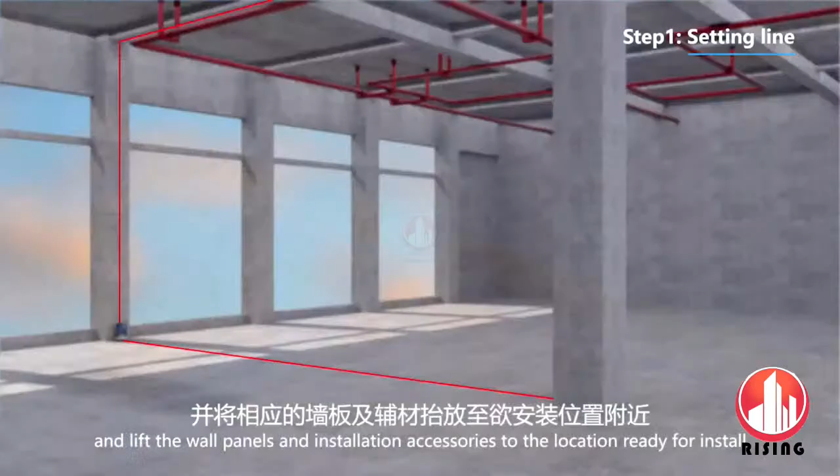Hammer, trowel, electric circular saw, electric drill, infrared level instrument, ruler, accessories, wooden wedge, steel bar, anti-crack tape, cement mortar. Step 1. Setting line. And lift the wall panels and installation accessories to the location ready for install. Step 2. Applying cement mortar. Apply Zhongjingtai Pacific cement mortar to the floor and the groove of the wall panel.

Step 3. Installing wall panel. Assemble the cement mortar-filled wall panels into the right position. Lever from the bottom of the wall board with a gauging trowel. Make it tight. Temporarily fix with wooden wedges. Using L-type steel bar to reinforce the wall panel and floor or ceiling.

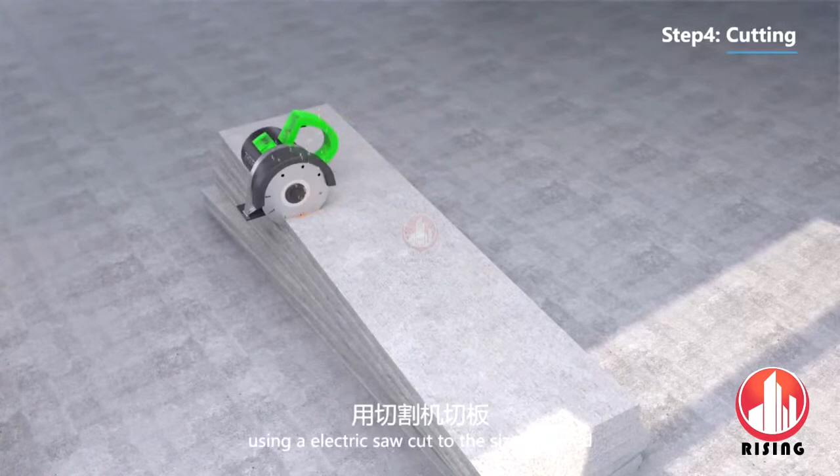Step 4. Cutting. Using an electric saw, cut to the sizes needed. Length 180 by 6 mm steel bars are required to enter from the 45-degree angle into 2 panels. Step 5. Correcting. Step 6. Grouting, filling up cement mortar. Step 7. Sticking anti-crack tape.

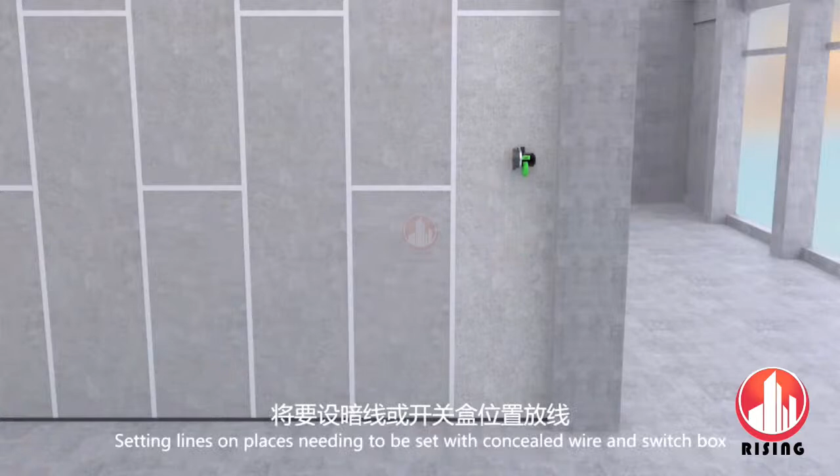Step 8. Slotting and wiring. Setting lines on places needing to be set with concealed wire and switch box. Then cut a groove by the electric saw, filling with specific mortar after installation. Step 9. Installing door frame and wall frame. Reserve enough space according to the size of the door and window. Then install the wall panel.

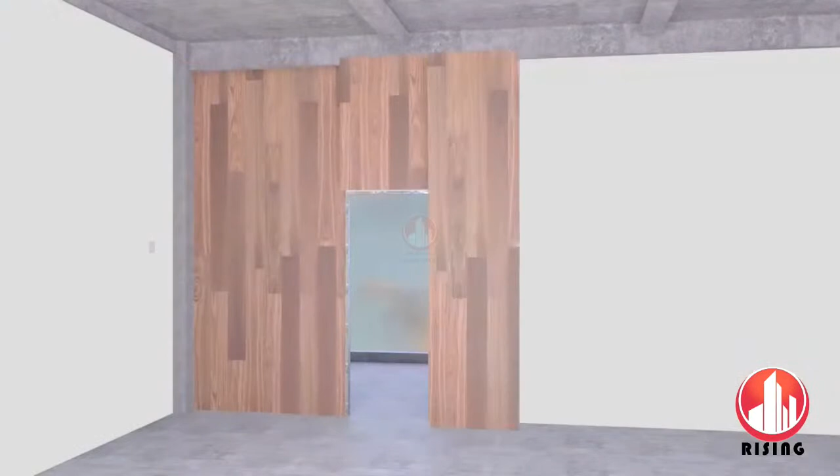Step 10. Decorating the wall surface directly by plaster, wallpaper, tiles, and other painting. If the height of the wall exceeds 5 meters and the length of the wall exceeds 8 meters, the square bar, H-bar, or channel steel should be added correspondingly to strengthen the joint.

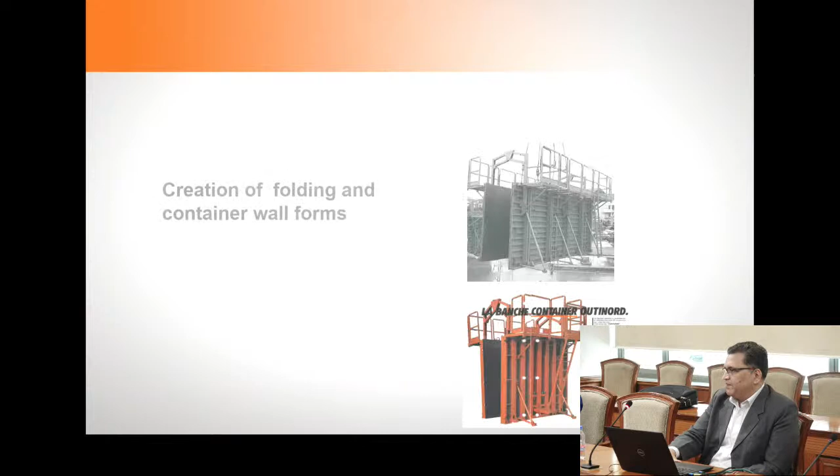So these are some of the milestones on our journey. As I said, we started with steel formworks, wall forms, column forms. Then this is the first type of tunnel formwork which was used. These are the other milestones on the way. These are some new wall forms which were introduced, and these are our safety platforms which can be integrated with any kind of construction, all conforming to the international standards of safety.

And now we have a product line, tunnel form, which is what is being used at Rajkot. This technology gives you a solution to cast your slabs and walls together, and we can have a daily pouring of slabs and walls up to about 2,000 square feet, and with that we can achieve the speed of construction. So it's ideally suited for projects which we want to finish in good time with good accuracy, and with a combination of the features the system gives you, we can achieve the efficiency needed for the project.

So these are our other system, which is called the wall forms. These are used for all the vertical members. This is another example where we can have efficiency, in the sense that practically what is being achieved in India today is we are able to cast a single pour of up to about 30 running meters of wall of about 3.5 meter height. So that is the speed with which we can achieve the construction.

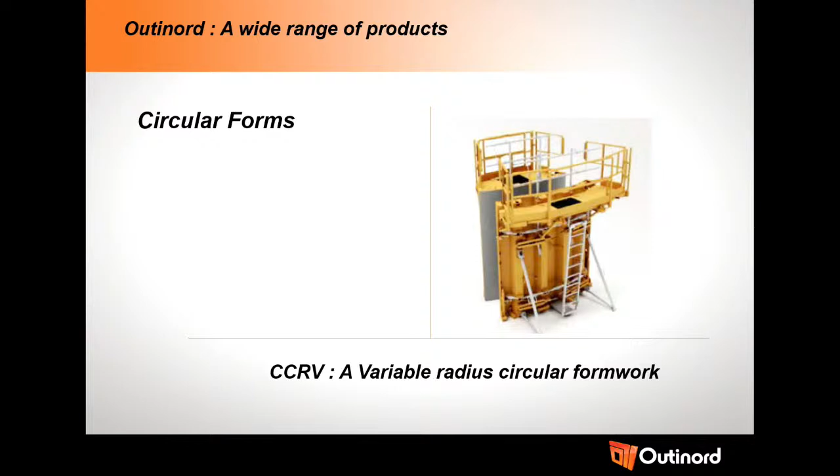Then these are our circular formworks; this is a variable radius formwork. So any structure which is above 3 meters in radius, it can be adapted to suit that structure. So again, ideally suited for things like sewage treatment plants, your ETPs, or normal water tanks and so forth.

So our motto is to achieve what we call industrializing the construction process. Using a minimum number of components and giving you the accuracy of construction, what we are trying to achieve is efficiency, where we are using mechanical means mostly for moving the system, and in the end reducing our dependency on labor, where the skill set of the labor is becoming scarce, looking at various factors which have been there for all the projects going on at this point of time.

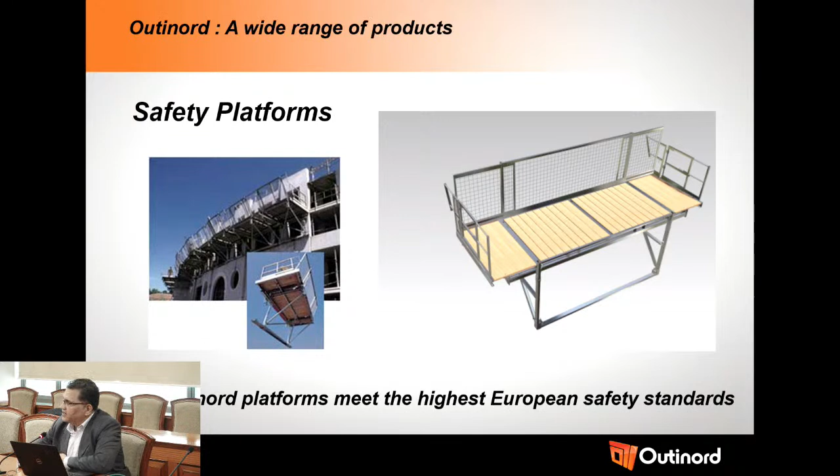Okay. So these are our safety platforms, which again give you flexibility of using them in a scenario where there is a wall or if there are only slabs cast. And also we can increase the length, we can increase the width. And these are typically used on our tunnel formwork, where the weight of the tunnel can go up to 2.5 tons. So they are very robust in design and can be adapted for all kinds of construction.

Then the finish that you get on the concrete with all our systems, if I may add, is an F5 or fair face finish concrete. So you don't need to go for any plastering on that. So plastering as an activity is taken out of the construction schedule. And then, as I spoke about, the accuracy of the system, then flexibility, because the same system can be adapted for various sizes, widths, lengths and so on.

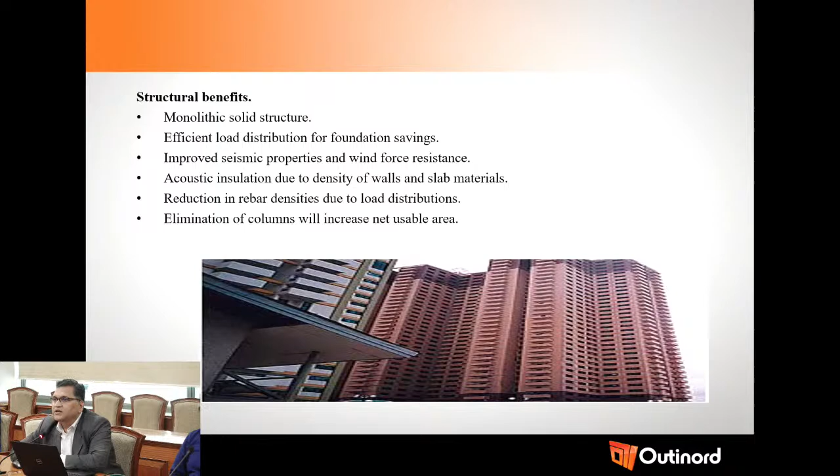benefits are concerned. All these products are giving you a solution for getting a monolithic construction. So all the inherent benefits which come from a monolithic structure will be available. One of the most important benefits is that these structures perform much better in case of an earthquake. So earthquake resistance is one of the best which is offered in all the built solutions that we have. Then acoustical insulation is again one of the better acoustical levels which can be achieved because we are using concrete as a structure.

Now, these are the benefits for the construction team. Typically, again, we are reducing the cost of construction, we are having much more predictable timelines and project cycles. And all the systems, as far as safety is concerned, are incorporated within the system itself.

So I mentioned a daily cycle or a daily slab cycle. So this is the gist of a daily cycle that can be achieved. Typically, if I'm starting my work schedule at 7 o'clock in the morning, the first thing is to do a quick cube test to see that the concrete has achieved the requisite strength. And once you are happy with the result of the concrete strength, that's when you start with the striking of the formwork. And all it takes for me to typically move one set of formwork from first pour to the next pour is about 5 plus minus hours.

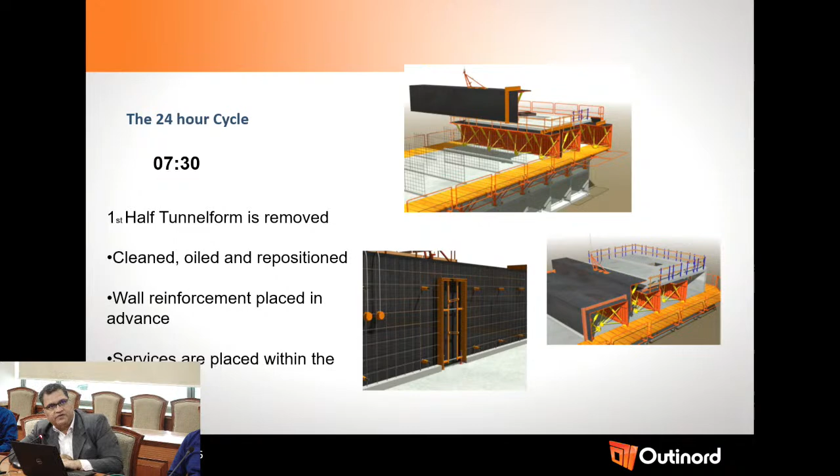So what we are trying to reduce here is the time which is needed for moving the formwork. In just 5 to 6 hours, all your formwork is at the second location ready, and then whatever time we need to spend to get the steel in place is what we are looking at for a daily cycle. So that's why on a thumb rule basis, anywhere around 2,000 square feet of built area can be achieved with a daily cycle. So you get all your utilities, steel in place, all your box outs for the doors, windows, etc. in place, and then all your packages in place.

Then you start introducing your electrical conduits. And then by about 2:30, you are ready to start with your concrete pouring. And if you finish your concreting by about 5 o'clock or so, then we are leaving the concrete in place till the next day at 7 o'clock when we are starting. So we are giving the concrete about 14 to 16 hours to achieve the requisite strength needed for striking the formwork the next day.

Here you can see that we've also shown in the visual that there are certain curtains being used. That is a practice which needs to be used if we are working in colder environments. Otherwise, for normal temperature zones, we really don't need to do this practice.

Now, these are some of the sample projects to give you a reference. This is the lighthouse project, where we recently finished the structural part, where we have constructed stilt plus 13-storied 11 blocks, comprising 1144 apartments.

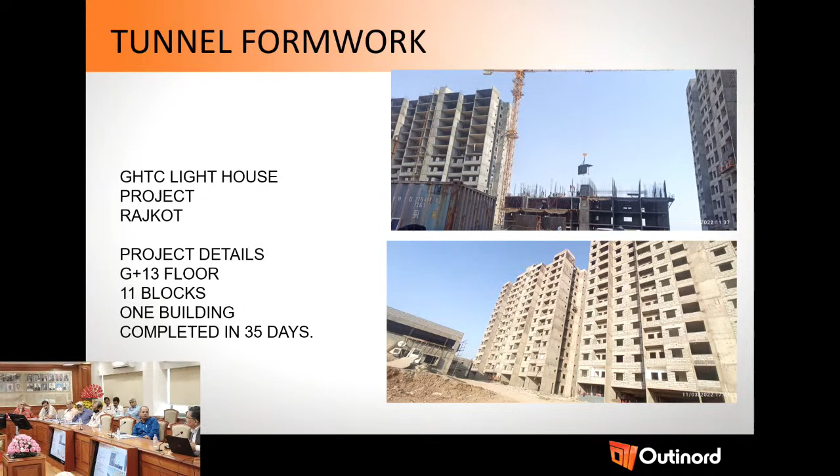And we gave them 2 half sets, so to say, for a floor plate, and using 2 half sets, they've been able to finish a stilt plus 13-storied structure, 2 of them in parallel, in 35 days time. So an average time works out to only about 3 days for finishing one slab. So that is the speed with which we can get any construction of this nature. In fact, that's why you can see.

3 days for half a slab? Oh, no, sir. 3 days is for the full slab, 1 day for one half and 2 days for the other half. So the portion which has your lift cores and your staircase wells, that portion they are taking 2 days, and for the other half they are taking 1 day.

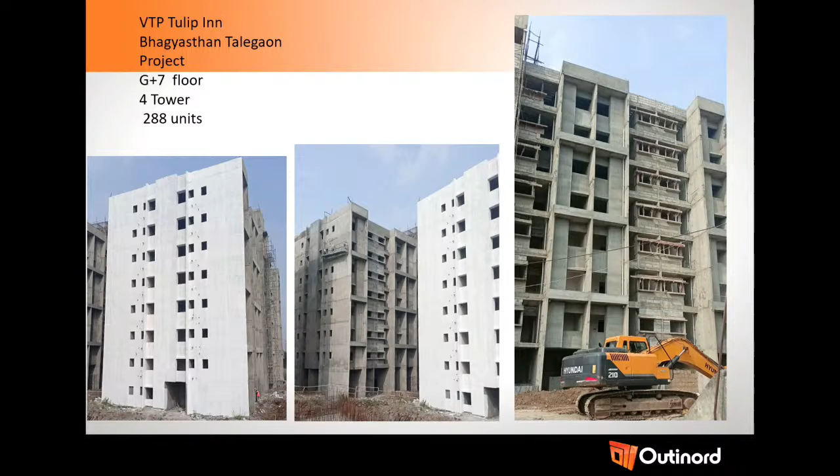This is one of the other projects we've done for a G plus 7-storied finishing, 4 towers comprising of 288 units. That's another project with the same group. That's a project we had done long back for L&T.

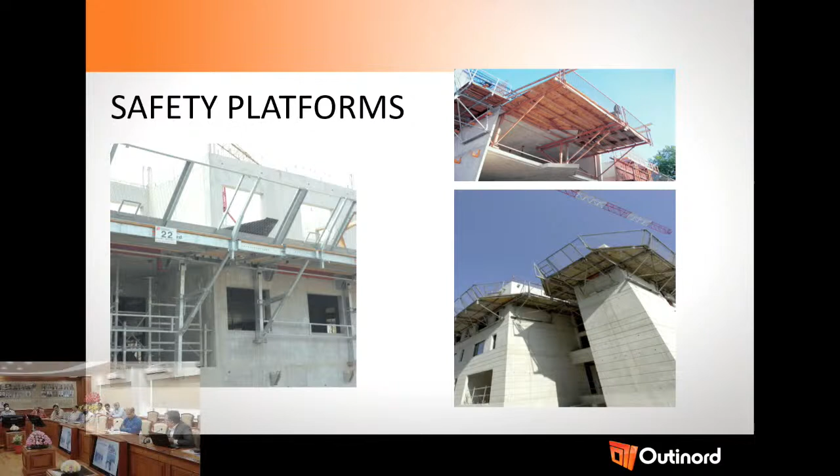Again, it is modular in nature, in the sense that you can stack as many as you want based on the total height you want to cast in a single pouring, as well as the segment of the circle you want to cast in a single radius pouring. The radius of curvature also can be changed. Yes sir, that's what it is. It is a variable radius system, but minimum is 3 meters. So anything above that, up to a straight line, it can be adapted to any curve.

So these are our safety platforms, which, as I said, can work whether there is a wall there or if there isn't any wall there. So all kinds of permutation and combination we can use them on.

So this is a sample of the speed with which we can work. This is the lighthouse project, as I said, and I've already told you they've been able to achieve a 35-day cycle for one tower. So these are the architectural layouts, and that's how it converts into a concrete drawing as far as tunnel forms are concerned. You can see the entire floor is being poured in 2 pours.

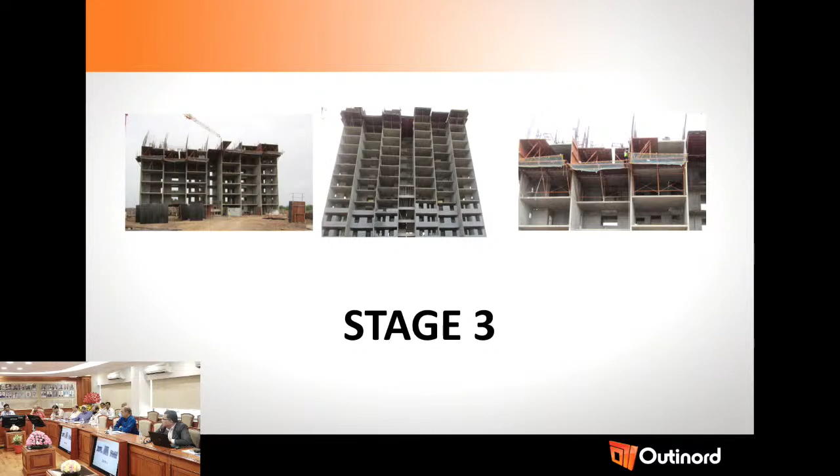So these are some of the various stage photographs from the same project. When the tunnel form is being finished on top, you can start with your finishing activity from the bottom. So it gives you that time to finish and do parallel activity processing, and that's how we achieve the efficiency. And that's how the finished project looks.

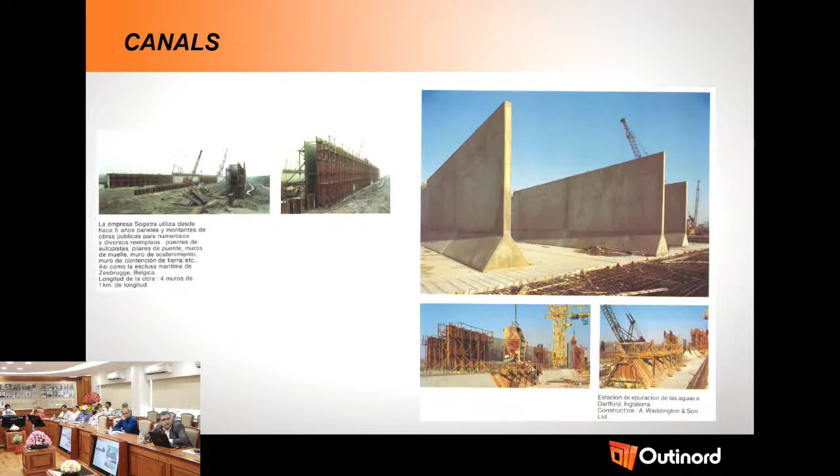So these are some other samples for other products, wall forms. This is a compound wall. Then this is an industrial shed, box culverts of various types. Then we also have system formwork for doing irrigation projects, canals, etc., in single pour or in various different lifts also, if required. Then these are retaining walls, an application of our wall forms basically.

So that's it. As I said, any project where you are looking for speed, where you are looking for accuracy, and where you're looking for efficiency, we can provide you with a system. So thank you all very much for joining here.

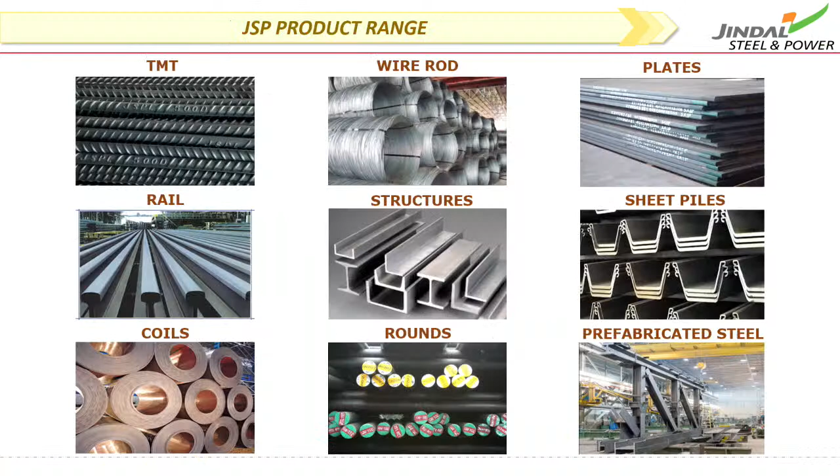Some product ranges important for composite construction - we are producing multiple products like TMT rebars in CRS grades. We have produced 50 millimeter TMT rebars now in India, and we received the BIS license also this year. We are also producing plates, rails, structurals and other sections, UBs, UCs.

These are structural sections - angle, channel, beam, column, sheet piles - all used for composite constructions. In the wire rod product...

Maximum grade you are producing by now? Pardon, sir? Grade, like say dia 50mm. Grade kahan tak abhi? 50mm and 45mm we have developed in 500D, sir.

Because it is seismic prone and the UTS-YS ratio is very high, more than 1.2, which complies with IS 13920 BIS standards for seismic zone code. 500, 550 also? No, 550 we have not developed right now. We have developed 500D in 45 and 50 millimeters, which will be used for heavy foundations.

These are some state-of-the-art technologies of our TMT rebar mill - it's a fully automated process. The beams and columns we're mentioning here - we are also producing up to 900 millimeter beams and columns of heavy sections.

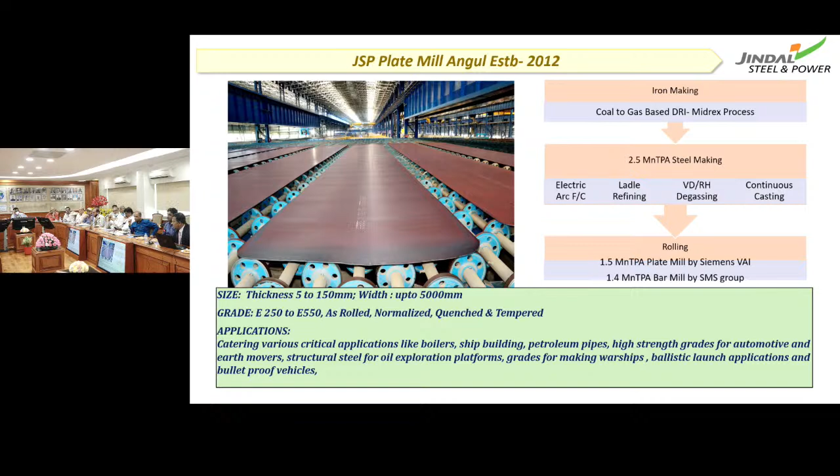In plates, India - we are producing 5 meter wide, one of the widest plates, up to 40 meter length. This is our state-of-the-art technology in our Angul plant, and we have grades developed from 250, 350, 410, 450, going up to 690. Further, we've developed up to 1200 MPa yield strength steels, and for defense applications, up to 1700 MPa strength steels.

This is one of the applications of sheet piles we use for various applications. For the Mumbai Coastal Road Project, we are using this sheet pile - this is our indigenous product of 15.5 millimeters. These are some applications, sir.

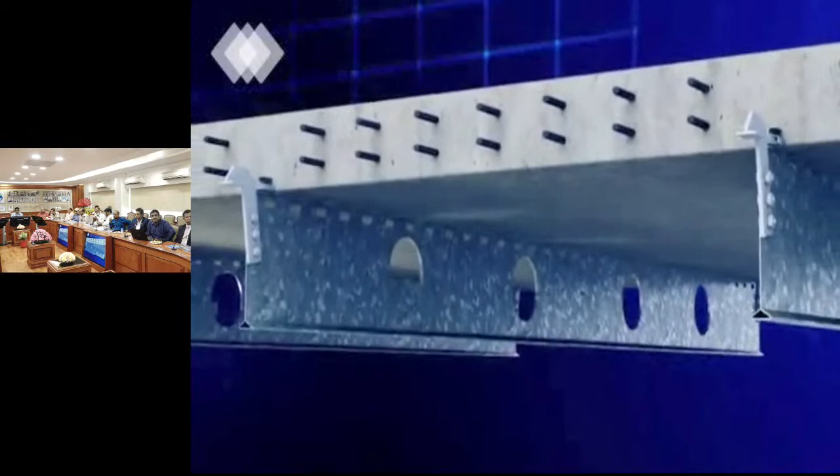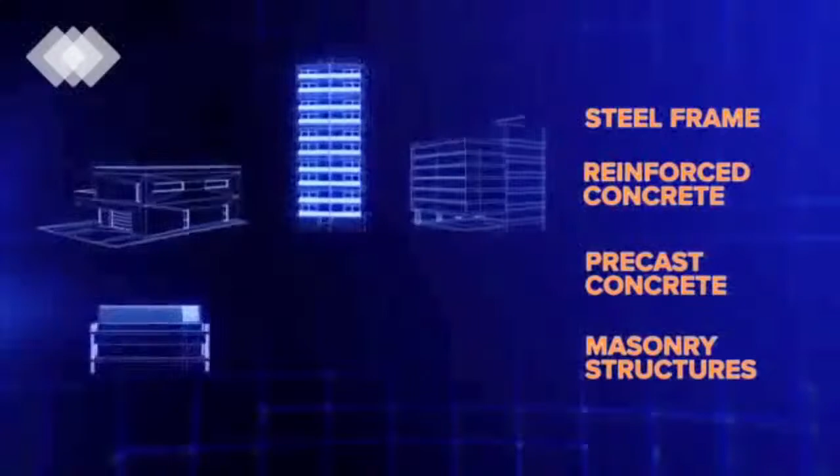Save building professionals time and money. With no backpropping required, SpeedFloor reduces construction time, enabling access up to 3 weeks earlier. Unique cold-formed steel joists maintain strength and integrity while reducing slab thickness, craneage and material costs. SpeedFloor's fully engineered system is a proven performer in all types of construction. Joists are delivered in bundles, craned onto the primary structure and manually moved into position. Lock bars are installed to hold the joists in position, form ply is installed, steel reinforcement is laid, and concrete is poured. 3 days later, the form ply and lock bars are removed and the floor is complete. Being up to 50% lighter than other slab systems, SpeedFloor is ideal for building extensions, with excellent spanning capabilities and versatility to run services through pre-punched holes. Suitable for housing, apartments, car parks, commercial and office complexes. With over 20 years supporting the construction industry, SpeedFloor represents the smarter, greener, innovative choice - lighter, faster, easier.

I'll show you another detailed video of approximately 5 minutes.

The SpeedFloor suspended concrete floor system is a unique innovation in the building industry. The system's been developed combining modern techniques and roll-forming technology to produce a fast-to-install concrete steel composite floor. For an equivalent span, SpeedFloor uses less concrete and less steel than any other suspended concrete floor system. It's easy to install, needs no propping, and in most cases is light enough to be manhandled into place.

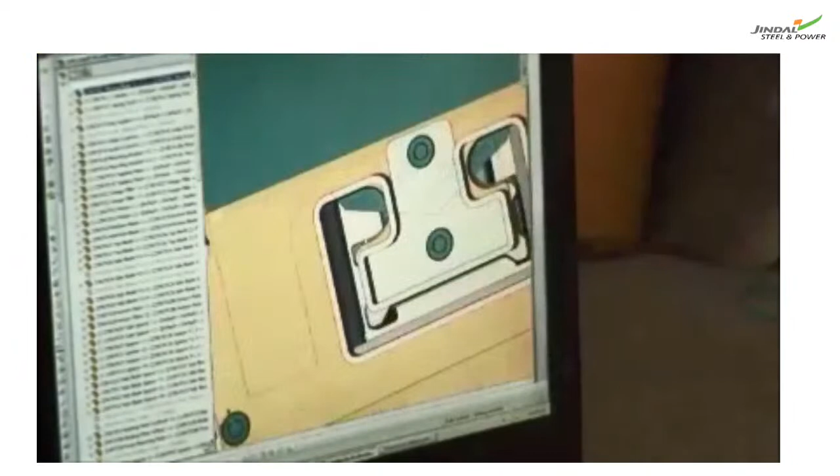It was developed about 12 years ago because we needed a product that was going to be quick and easy to install without having to rely on props. We had to start from scratch because there is no particular product worldwide similar to SpeedFloor. So we had to start off by developing quite a few profiles, and from then we went to a university.

The joist is manufactured from pre-galvanized high-tensile steel in a single pass roll former, where it's roll-formed, punched, pressed and slotted to a high degree of accuracy. After roll-forming, the ends are simply bolted to the joist.

On site, the individually marked joists are placed on the support medium, where a shuttering system locks the joist into the exact and final position. The reinforcement is placed and the floor is ready for concrete. 3 days after the pour, the shutters are stripped, revealing a smooth, clean soffit.

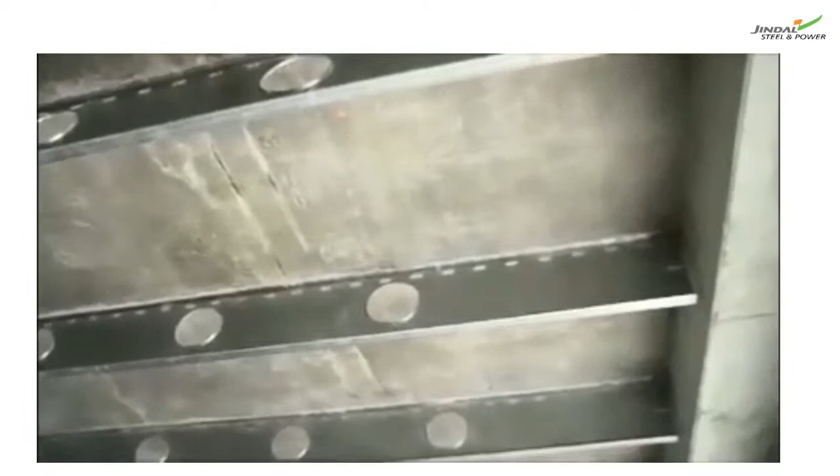This is the SpeedFloor system. Basically, it uses the steel joist with concrete topping over the top to make the composite system in the building. The heart of the system is a rolled, formed, galvanized, high tensile steel joist.

These are the advantages: no propping is required, less erection time, requires less craneage, meets fire rating requirement, reduce foundation size because of the lighter section, and can work parallelly in more than one floor at a time.

This is the end result of the SpeedFloor. 3 days later, we can remove the system and the services can pass through the pre-punched hole. These are the support mediums which enable the SpeedFloor system.

One is steel RCC frame structure, masonry wall, precast concrete frames, light gauge steel frames, timber frames. In all types of construction, it can be used. This is the difference between conventional and SpeedFloor system.

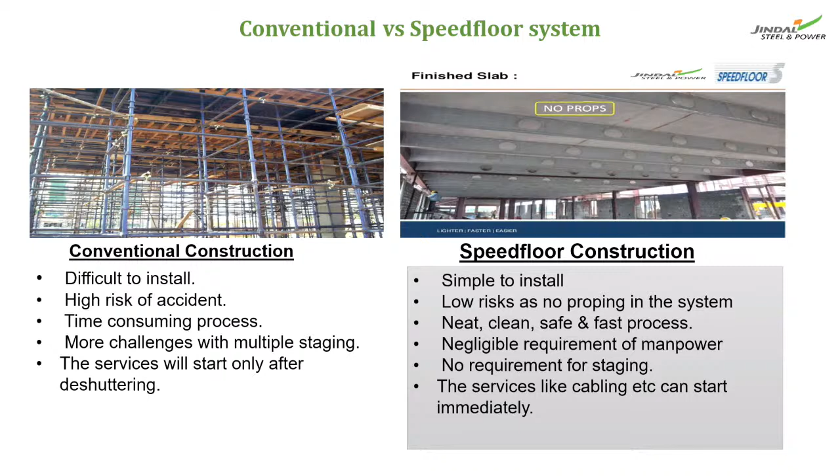These are the test certificates, which conclude the system is safe in strength, and the maximum deflection is within the allowable limits. This product is also in CPWD DSR.

This is our design capability. We are using ETABS, STAAD and TEKLA. ETABS is basically for composite construction, to design the composite columns and beams.

This is the fabricated structural steel. We are using 550 and 450 grade plates and universal beam sections to reduce the quantity of steel due to usage of higher grades.

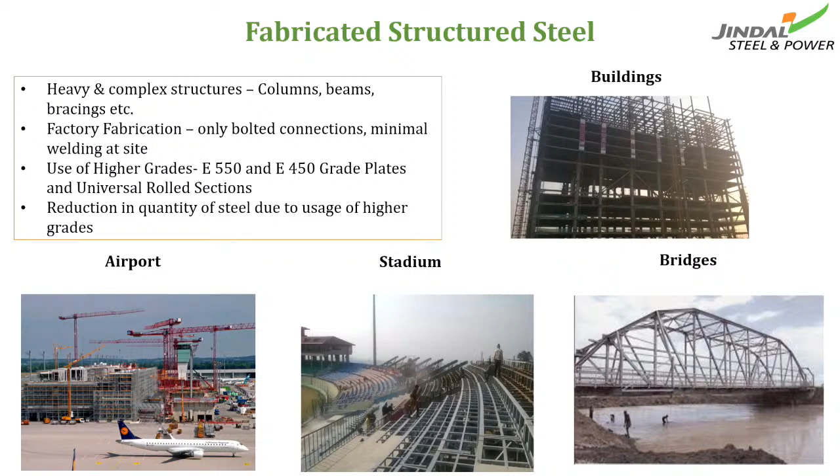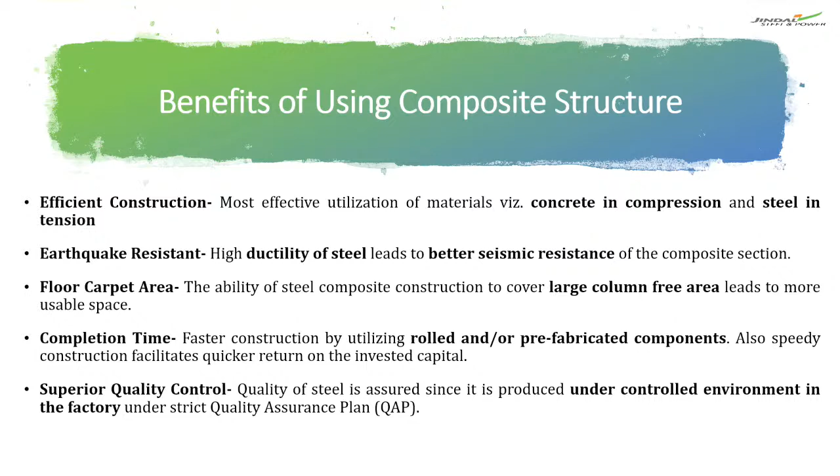The completion time is faster, a 7 day cycle you can achieve. Superior quality control, sustainability is higher, dead weight of the structure is low because of the light sections, and you get revenues early because you can complete the structure at an early stage. These are the applications.

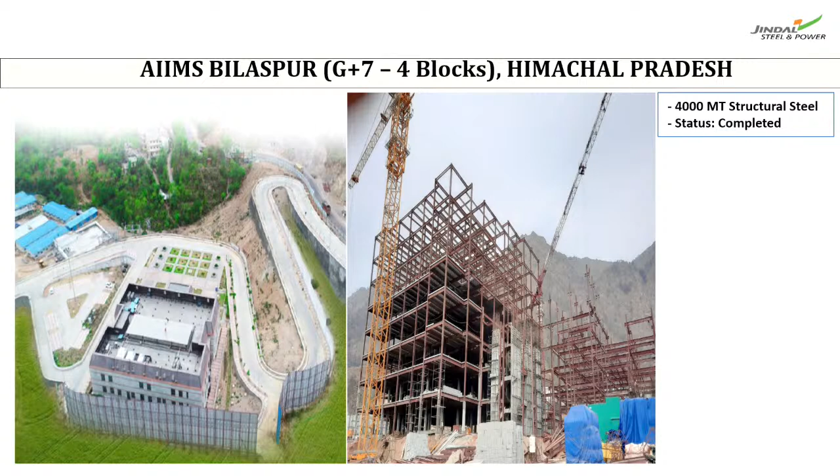This is AIIMS Bilaspur project, which we have done in Himachal Pradesh. G plus 7 storey structure, 4 blocks. All these projects, you are supplying something. You have not done the erecting also, sir. Like AIIMS Bilaspur is done by NBCC, further by NCC. You are supplying the composite. We are supplying, and erection also we have done, sir. Like they were saying that you have done it, but you have not done. No, we have supplied the material and the complete structure we have done.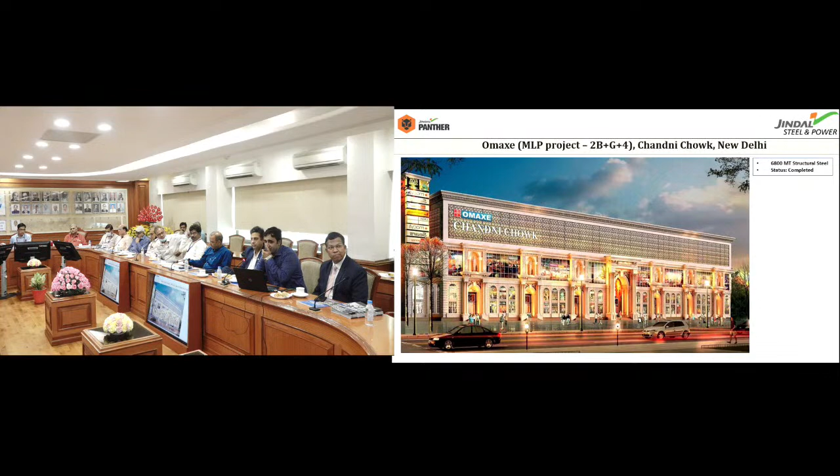This is another project, sir, Omaxe Chandni Chowk. This is also with composite construction. Windsor IT building, sir, 2 basements plus G plus 14. Fairmont Hotel, 7-star hotel, sir. This is also with composite construction. M3M project in Gurgaon, sir, G plus 40. This is also with composite construction.

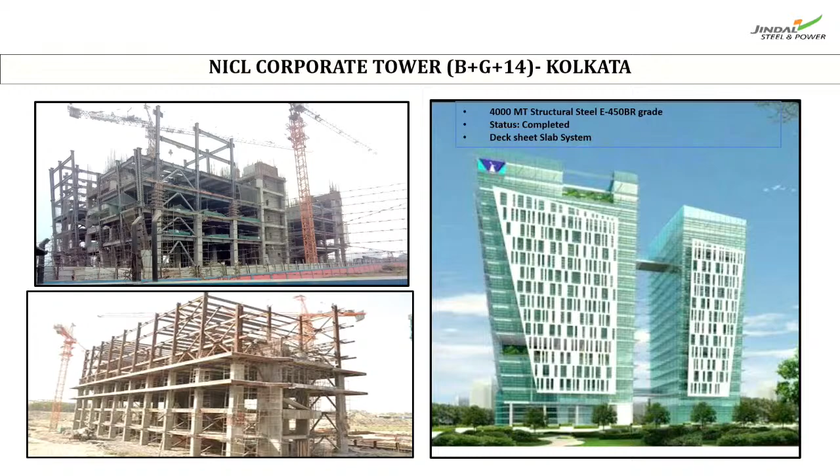This is multi-level car parking, sir, G plus 10. This is also in composite. NICL Corporate Tower, NBCC, sir. This is also in composite. Raheja Mindspace, G plus 14, Hyderabad. This we have completed, sir. S2O IT Park, sir. This is also in composite and it has completed also, sir.

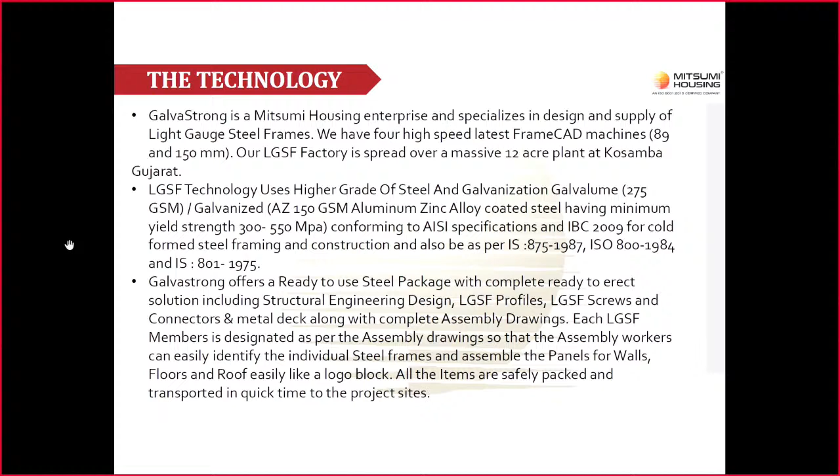Mostly zinc alum or galvanized sheets with galvanization of 250 to 275 GSM are used. High strength material, 300 MPa to 550 MPa. The design standard in this country is IS 801, but unfortunately it has not been updated for long. Now the draft is under consideration; some of us in the BIS committee must be aware that IS 801 is under revision and soon will be released for wide circulation. Then we will have provisions of the latest international practices. As of now, we use either American Institute provisions or Australia New Zealand standards for the design of cold form sections. This is the entire process.

One very good thing with light gauge systems is that there are complete manufacturing solutions with a CNC compatible interface, where the drawing of an architectural layout with the structural elements identified is fed in, and the entire design using standard sections, either C shapes or channel shapes with lips, is designed inside and manufactured according to the dimensions of the entire house.

To give you a brief idea, a house of about 800 to 1000 square feet, single story, can be completely manufactured from that machine in about 2 weeks' time. The entire material can be manufactured, ready to be assembled on site. That is the advantage of that particular thing. Design and analysis, that is the first thing.

Then the second one which you see here, this is the machine which produces the components, which are then assembled at site. Then on both sides of this framing, which is laterally stiff, braced together for the lateral and gravity forces, some kind of board is placed. There are various types of boards available, and it's a choice depending on the geography, the function, and the internal environment needed, thermal, acoustics and heat insulation, that you can use different types of boards.

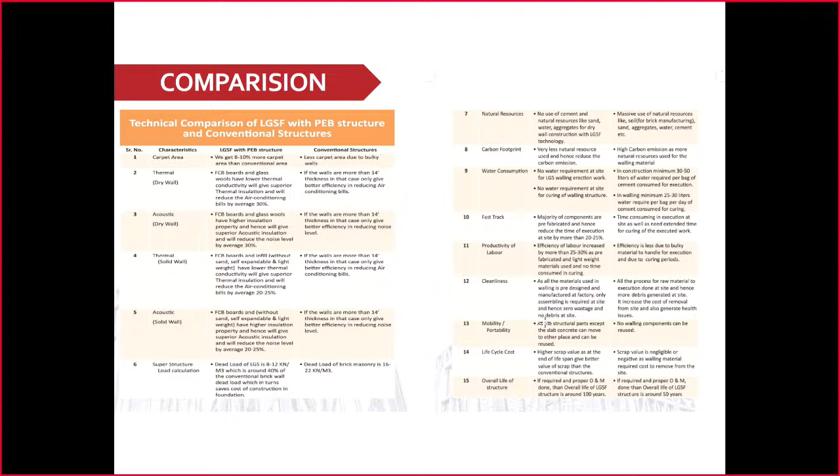So we are sure to get a consistent material and a good quality product, where when we say design life is 60 years, it is sure to have 100 years. While with concrete, when we say 60 years, after 30 years we all know the fate of the concrete, because of many reasons. So this is the scope of LGSF. You can make almost everything.

Up to 3-4 floors, you can directly have the load-bearing wall construction using the LGSF straight away. But beyond that, we have used it in 15-floor buildings. India's largest residential complex in Jammu, Vidhata Nagar, we did the designing where the hot rolled steel was the main frame, and all the infill walls were LGSF wall panels. In JSPL Angul plant itself, we have made 11 buildings of ground plus 11 height, and all have the infill LGSF walls. So very fast construction.

By the time your HR frame goes up, parallelly you can have the wall assemblies done of the same size and erect them, lift them, put them on the site, put the boards and all that. So parallel working is possible with a very fast construction. Yes, sir. It is there, sir, on the right side.

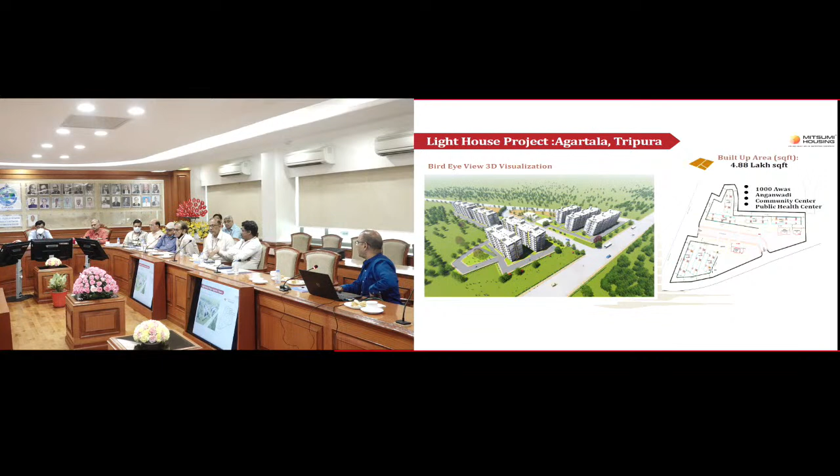This is another project, that is Agartala, Tripura, which are ground plus 6 under PMAY, 1000 flats. So HR frame, and inside the infill wall is all LGSF with the boards. Now in this project they are not using the cement fiber board directly, but Mitsumi has developed a core which is used in this. They are using foam concrete filled inside, so that problem of cracks doesn't arise. Several other projects have been done with foam concrete. And this is about the general. I'll take some more time and show you the technical part of this.

Some of the advantages which I have already described: housing demand versus supply, because we need rapid mass housing, so something has to be done. We have to deviate from the traditional business, the way we make houses, and probably there is a big role here.

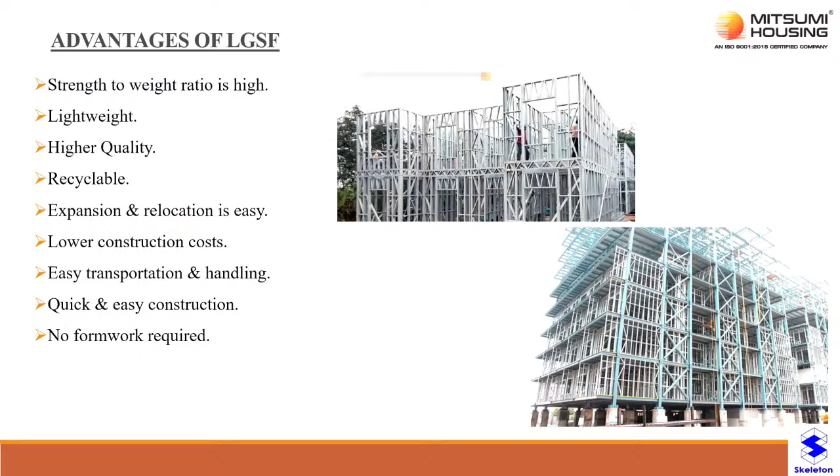Technically, strength to weight ratio is high, lightweight, higher quality, recyclable, expansion and relocation is easy, lower construction costs, easy transportation handling, quick and easy construction, and no formwork is required. The entire construction can be done with the LGSF components without any formwork.

Components are like: one main frame is there, wall panels for walls, then wall connections are there, wall openings are there, claddings, flooring system and roof system.

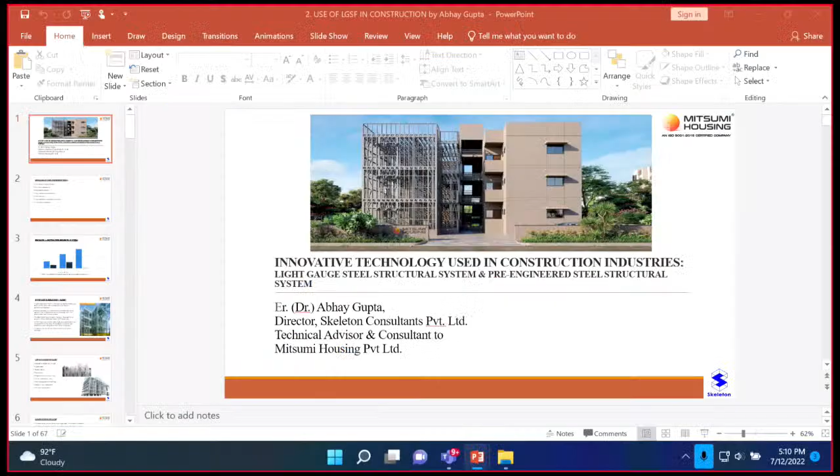Some more of the components and the way they are made, like this. This process we have already seen. I'll show you a video also on that. We have already discussed these things. This is the way the frame and the house are finished. Actual photograph.

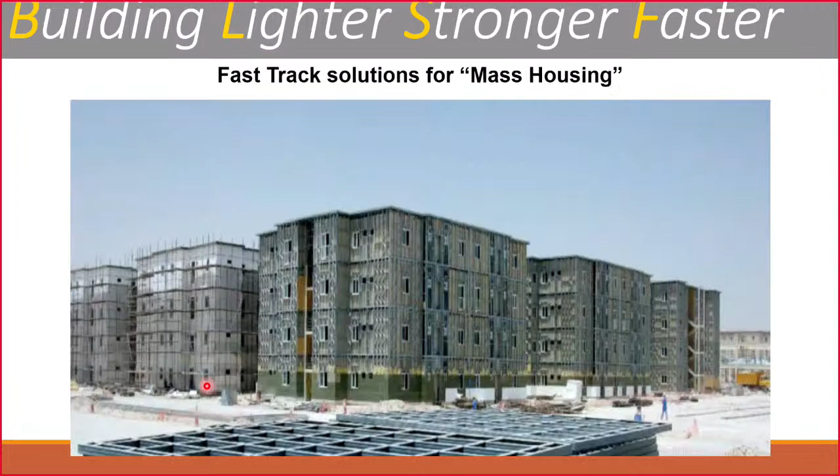Mass housing, all ground plus 3. This is some basic information about cold formed steel. And I'll show you one very interesting thing in that.

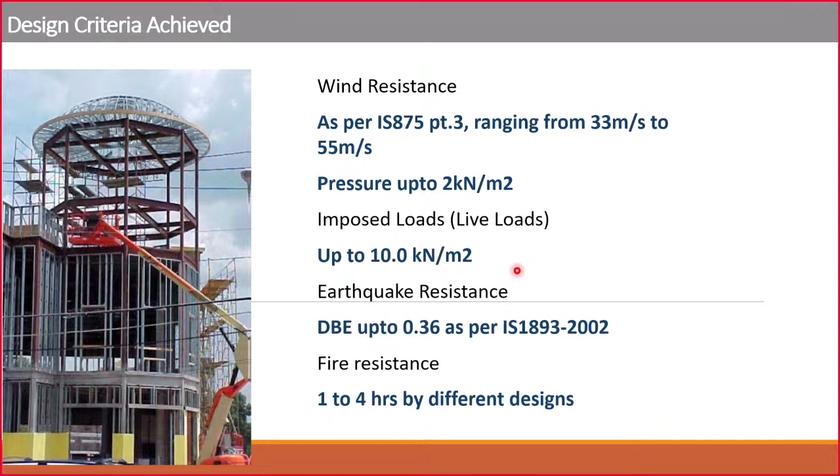Just the conceptual things when we initially do that. This presentation is not customized for this audience, I have this for some other platforms also, so some of these slides may not really apply. But this can sustain strong wind forces and seismic forces.

There are international codes, US codes, then Canadian codes, New Zealand, Australian codes are there, and we currently have to use those only. IS 801 is not that updated right now, but we have some of the provisions there.

Dimension wise, we can have clear spans, truss spans up to 20 meters. Like in the hill areas, a lot of construction is being done using these kinds of things. Being lightweight, they sustain seismic forces also.

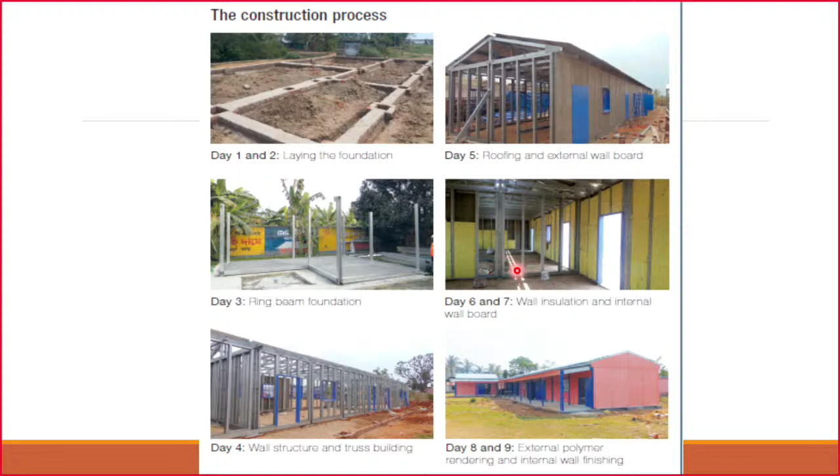Process, how the construction goes on, like this. In 9 days you can complete the house like this. They say this is some European practice, because they are much more practiced in these things. In India, if you want to adopt this, maybe this 9 becomes 36 days, that's all. Soon we will be equipped with all the latest things in this also.

150 mm and 89 mm, both sizes are available, and you can see the core wall details where gypsum boards are on either side, then rock wool insulation, and then cement board etc. on the inside. This is the general construction. You can have 204 thick wall, 143 wall, depending on the fire resistance and other parameters required.

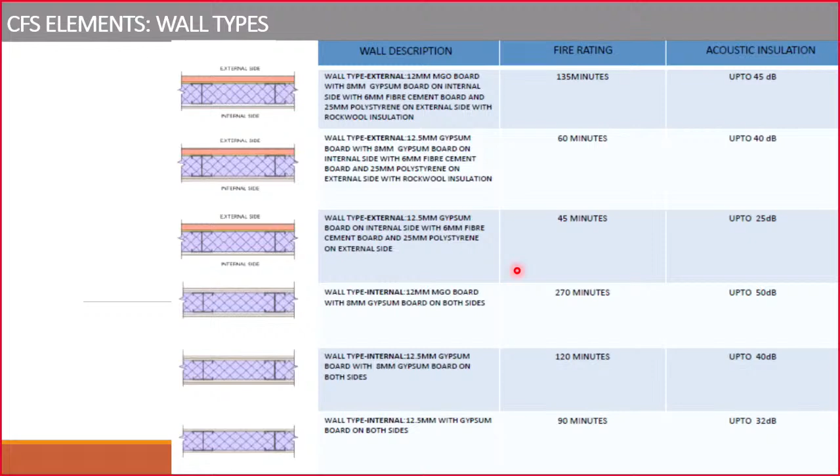We have been able to achieve 2 hours of fire rating also with this kind of construction. This is a table with different constructions, showing how much fire rating and how much acoustic insulation would be achieved. So up to 270 minutes fire rating can be achieved with some different kinds of filling and all that. It's well documented, tested and everything.

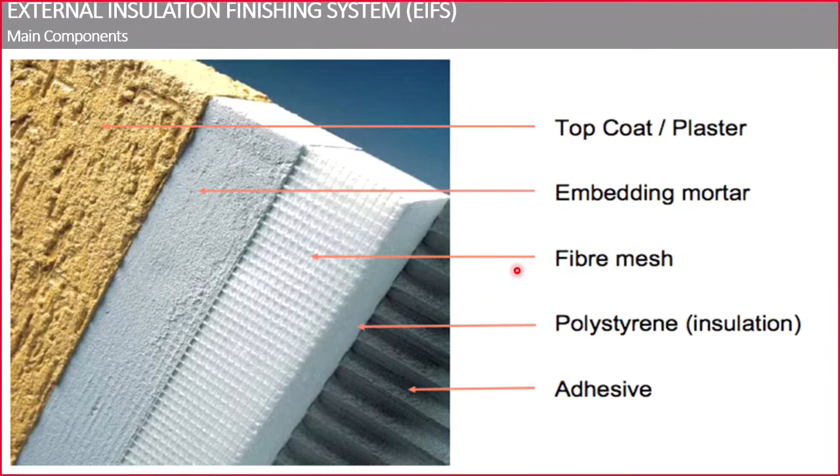With the EPS polystyrene insulation inside, you get increased fire resistance and acoustics and all that.

So we need not bother much about it unless aesthetics is the question - corrosion loss does not significantly reduce the strength, unless we continuously remove the rust and new rust forms again. So exposed steel will survive long because of that.

This is a school rooftop structure we did - an existing school, and then we constructed another structure on the rooftop. This was the entire thing, completely modeled at once. Then a multi-purpose hall. These are all Indian projects, done by us only on the design side, all of them.

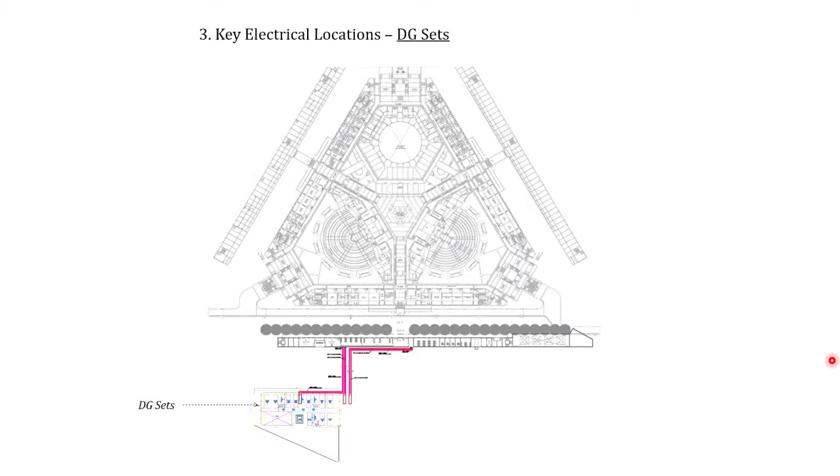This is the electrical distribution.

This has been divided into nine zones. This Parliament is a 4-floor building: lower ground floor, upper ground floor, first and second.

In every zone, except zones 7, 8 and 9, zones 1 to 6 have 4 floors, and each electrical room is situated one above the other. So there are 4 electrical rooms connected with the rising main - solid connections are there.

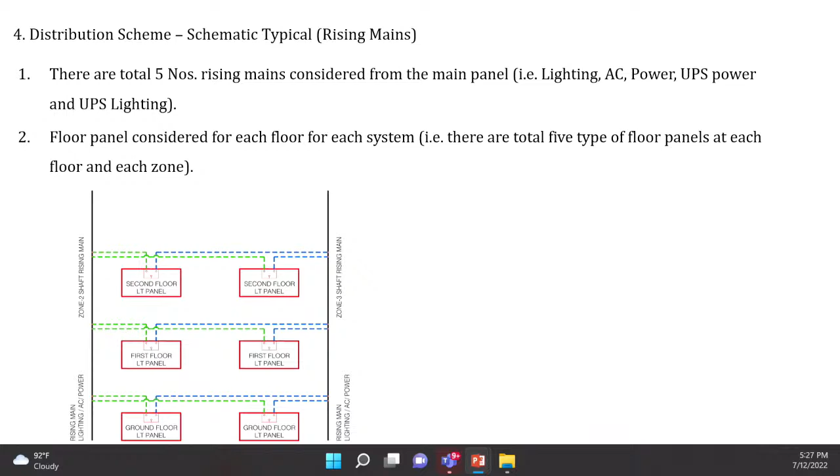This gives more redundancy details about what I just told you.